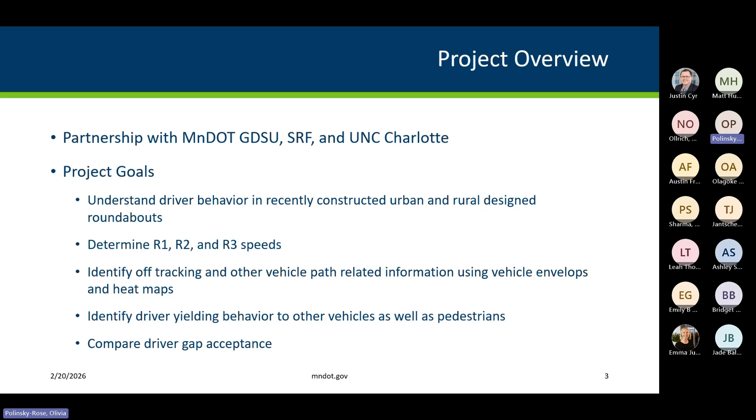Here are our roundabout locations. We have 2 urban roundabouts and 2 rural roundabouts. The Trunk Highway 59 and CSAH 3 urban roundabout and the Trunk Highway 75 and CSAH 21 rural roundabout are located in northwest Minnesota. And the 2 Trunk Highway 13 roundabouts, one urban and one rural, are located in southeast Minnesota. One thing to note, the urban roundabouts were selected because they have similar geometry as well as similar AADTs, and they are close to the rural roundabouts.

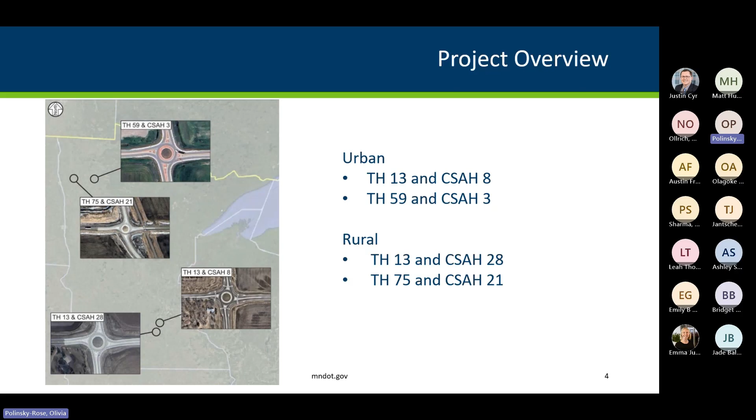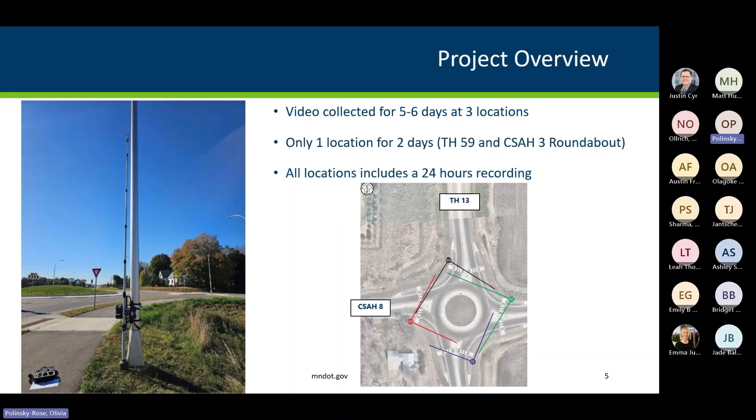light pole nearby. And videos were collected for 5 to 6 days for 3 locations, only 1 location for 2 days. That was the Trunk Highway 59 and CSAH 3 roundabout location, due to issues with equipment. All locations included a 24-hour recording, as our goal is to capture driver behavior at night time.

splitter island. On the Trunk Highway 59 and CSAH 3 location, the pedestrian accommodation is slightly different. It's actually immediately back of curb.

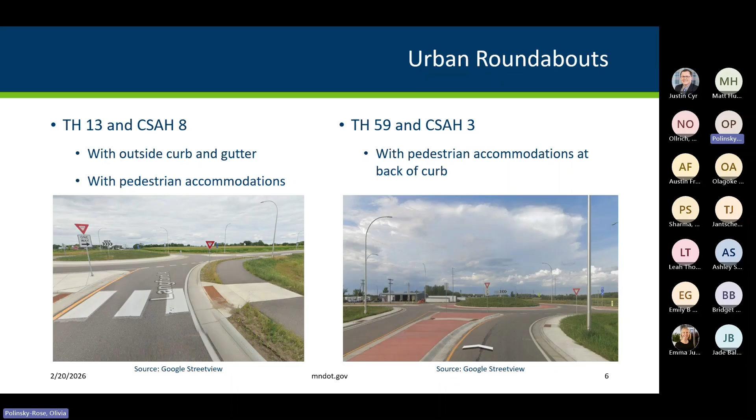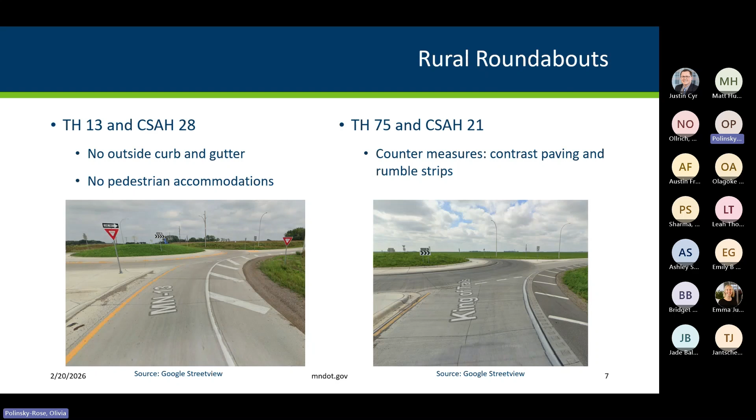And with that, I'm going to turn over to Justin. Justin, if anybody says they can't hear me online, I'm going to clip this. I have 2 hands here.

So thanks, Gwen. I'll give an overview here of the AI program itself. Can't take any credit for this. This was all UNC Charlotte. Out of their electrical engineering group, they've developed this model. One of the reasons we went with them, their model specifically uses and has been trained on lower resolution cameras.

A lot of the safety studies that folks are doing, one of the biggest things we hear from the vendor side is we need high definition video, right? We need HD. And given the location of the roundabouts, we were kind of concerned with battery life, being able to collect this from a high definition standpoint without a power source out there, without a trailer mounted camera.

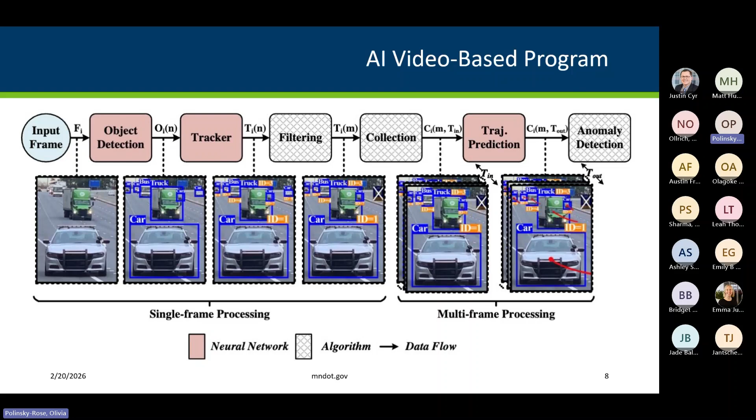So that is my non-scientific description of what this is doing in the background, but a nice picture here in terms of what's going on. This is a screenshot of the system operating.

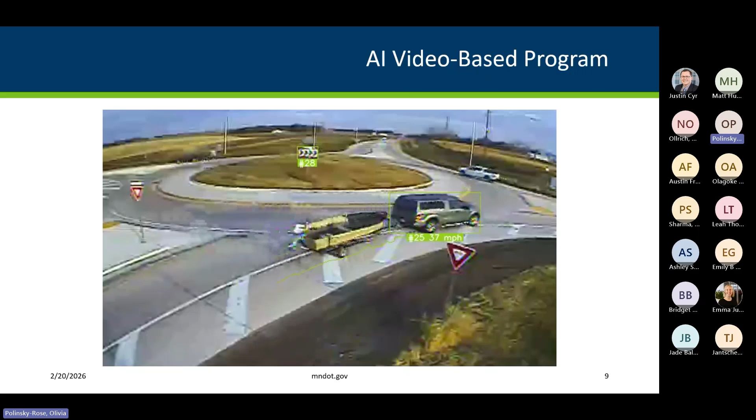As Gwen mentioned, we did a survey of the districts. So District 1, 2, and 7 have all implemented a rural roundabout design in the districts. And so we wanted to ask them, how are these working? You know, why'd you do it? Why'd you go that route? What were some of your considerations from a design standpoint? Was cost a factor? Were peds a factor?

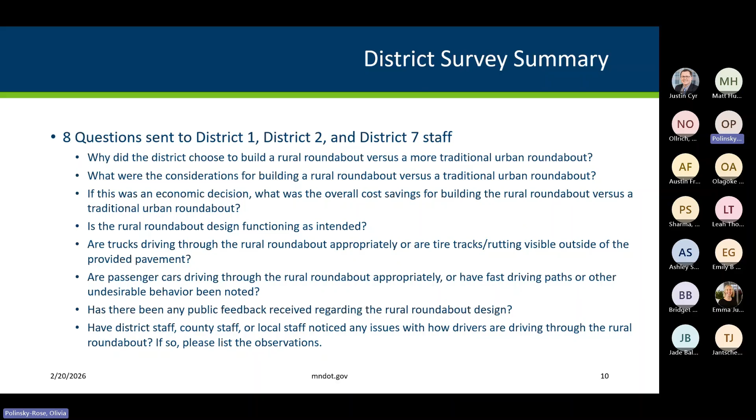And so these are the 8 questions that we asked. Not going to read all of them, but the answers can really be put in 4 buckets. So we've got the design considerations and location piece. So to what Gwen mentioned earlier, the context was key, right? Why do you do this? We don't necessarily, from a maintenance perspective, want to have full ped accommodations out there during snowstorms. They saw it as a potential liability, being able to get out there in time to clear it.

The functionality piece, in general, they were operating as expected, but not a surprise. Folks were, at least visually, they felt, driving through them faster at a higher speed than a traditional urban roundabout with that outside curb and gutter. From a maintenance perspective, the rural roundabouts did see quite a bit more off tracking, and you'll see that in some of the videos, some of the heat maps that we're going to show later. You can actually see the rutting in those pictures.

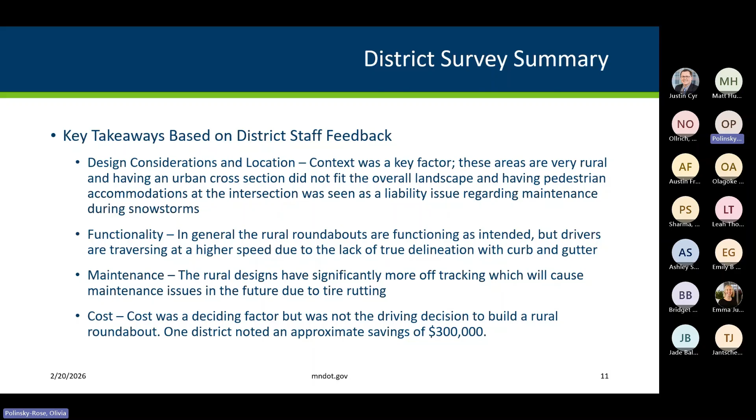Cost was a factor. We had one district that noted a $300,000 savings on the cost of the roundabout, but it wasn't the key factor, right? It was just one of many factors that they took into consideration there.

So as Gwen mentioned, we had 4 locations. So we have our two urban locations. This was the first one, Trunk Highway 13 and CSAH 8, which was in the southeast portion of the state. This is the one that had the trail facilities with the separated grass median there. The values you're seeing on the screen, these are our R1, R2, and R3 speeds that we were able to gather from each approach, and its average speed, 85th and then the 95th percentile.

Some of them do have a star next to them, just due to the lower resolution camera and the width of these roundabouts. You can imagine, when you're looking at that exit speed way back here at the crosswalk, you're about 200 feet away, give or take. And while with an HD camera and some of the technology that's out there, we might be able to capture a speed there, how accurate it's going to be, it's going to be tough.

I see Joe's. I can do that. For those who aren't familiar, R1 is actually right before the crosswalk here on that entry speed. And then R2 is kind of right in this general area here from a circulating perspective. And then R3 would actually be on the back side of that far crosswalk. So that's part of the reason why that R3 speed is so hard to capture from a video perspective, at least in this field of view.

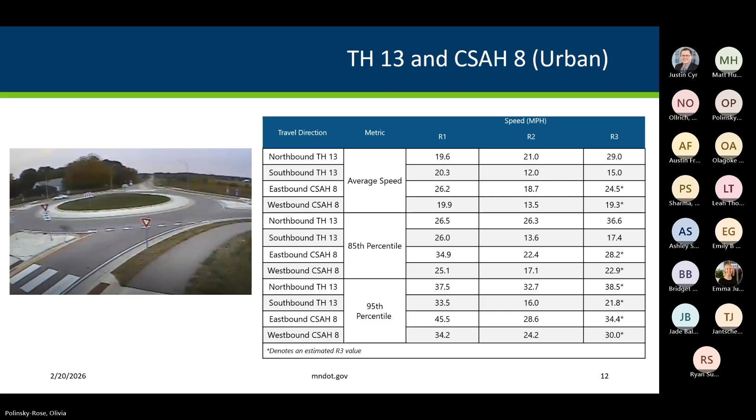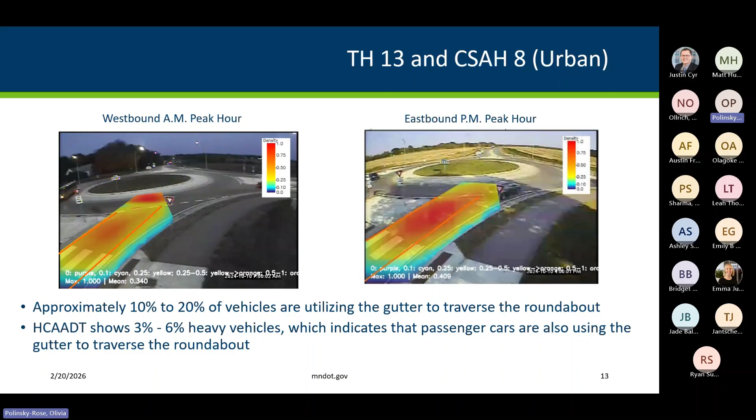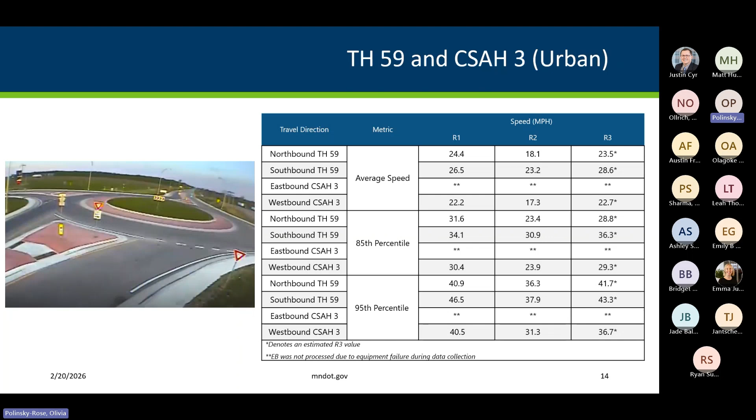Similar situation for the other urban roundabout in the northwest portion of the state. As Gwen mentioned, we did have a camera issue out here for this one, so we didn't get as much data, and unfortunately we lost the ability to get good eastbound information at this location as well. But from a number standpoint for R1, R2, pretty consistent from what we saw at our other location. And then similar from a heat map standpoint too.

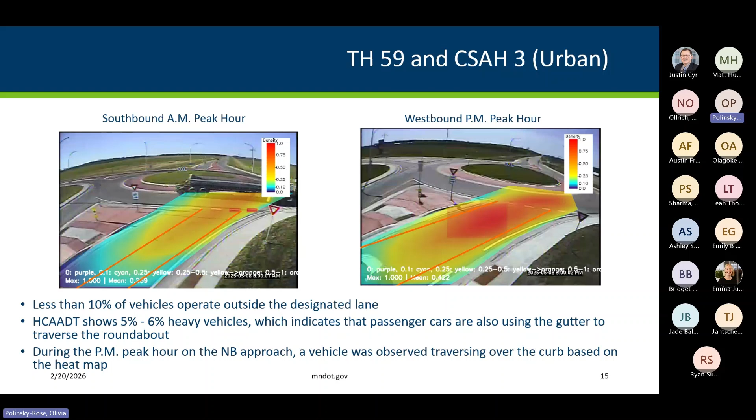So for this one, a lot less in terms of people kind of driving outside of that designated lane, out onto the gutter. But we do have a little bit higher heavy vehicle percentage. So apparently folks in Northwest Minnesota stay in the lanes a little bit better than folks in Southeast. But I will note that we did have one of the trajectory lines that actually went over the curb. So we did have one vehicle that traversed over the curb at this location.

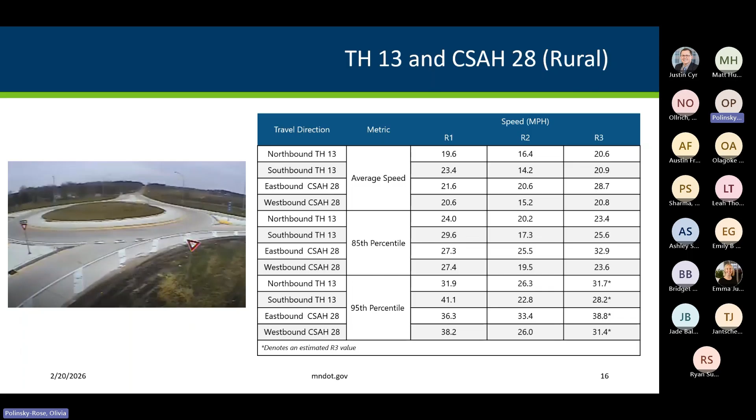Now the rural roundabouts. So this was the other Trunk Highway 13 location down in Southeast Minnesota. This location had just a striped shoulder. This is the one that did not have the color contrasted pavement with the bit on the outside. And you'll notice in general, the R1, R2 speeds are higher across the board. If you went approach by approach, they might vary a little bit, but in general, they are higher for this location. And I mentioned earlier, for those in the room, you might be able to see it, maybe not, the rutting as well in that camera view. So some significant tracking issues here at this location.

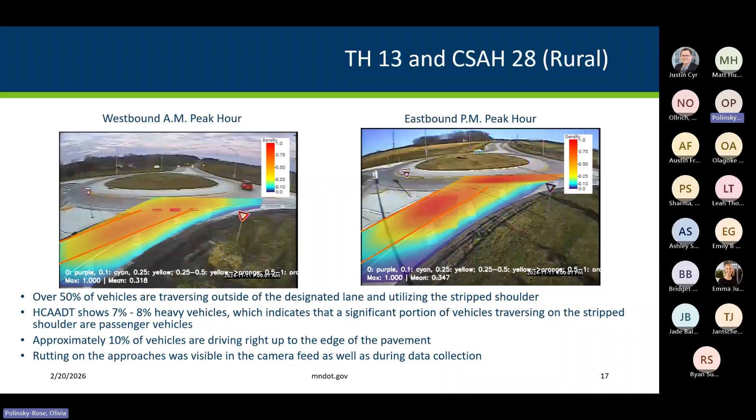And our heat maps told us the same story. So we had over 50% of the vehicles actually traversed on the striped shoulder to go through the roundabout, and only 7 or 8% heavy vehicle. So quite a few passenger cars that are doing the same thing. This is the example too with the boat from earlier. So quite a few folks who are doing it. And we had 10% of the vehicles actually driving right up to the edge of the pavement. So they are cutting it as far over as they can to get through the roundabout. And then I mentioned the rutting as well on this one.

Our other location, Trunk Highway 75 and 21 up in Northwest Minnesota. This had the color contrasted pavement, as Gwen mentioned, and the rumble strips right on the back side of the edge line there. In this location, R1, R2 speeds were about the same as the urban roundabouts, and were slightly less than our other rural roundabout. So in general, people were kind of slowing down a little bit more. The biggest difference is really in that R2 speed column, where we saw the most difference between the two rural designs.

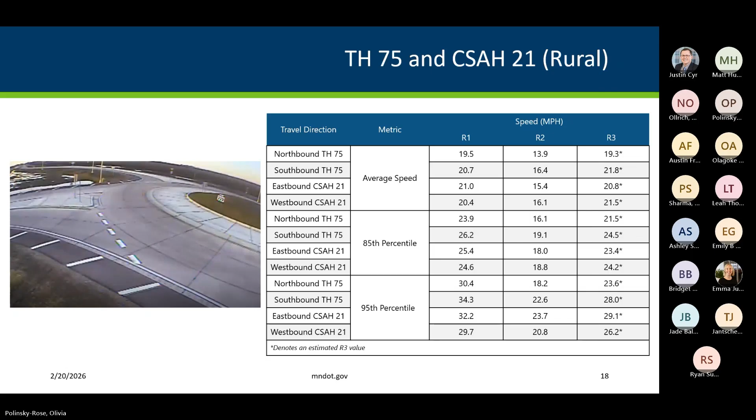And the heat maps tell the same story. So less than 10% of vehicles actually off track outside of that designated lane, so on the striped shoulder outside of the rumble strip. And we had 28% heavy trucks here, so not all trucks are tracking off either.

So this really kind of helped keep people in the lane where we want them to be, provided that kind of line of sight for folks. Where am I supposed to be? Where am I not supposed to be? And at the time that we did this, there was no apparent rutting outside of the pavement either. So another nice piece there for this one.

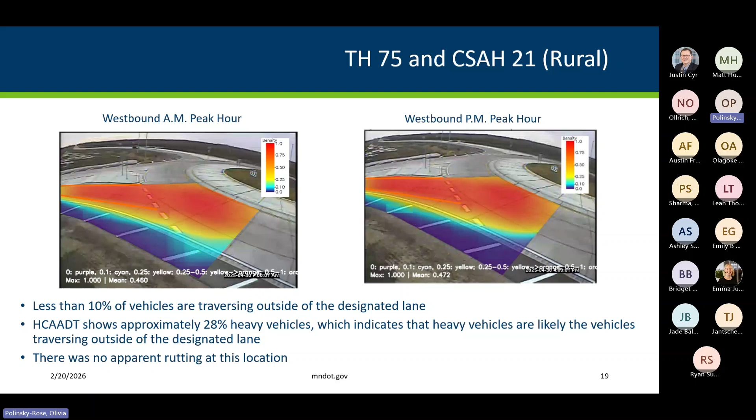But you can see the lines are a little harder to see on this one because the density is so high there in the traveled lane, but everybody's kind of hugging that inside island and then going to the outside as they traverse through, kind of traditionally what we would expect to see. And with that, I'm going to turn it back over to Gwen.

All right. Is it on? Okay. These tables summarize the data that Justin has gone over. So it summarizes all 4 roundabouts, all 4 R1 speeds, and it summarizes the average speed, the 85th percentile, and the 95th percentile.

As you can see, when you compare the R1 average speed between Highway 13 and CSAH 8, and Highway 13 and CSAH 28, the rural roundabout has slightly higher R1 speed when compared to the urban roundabout. However, when you compare the Highway 59 and Highway 75 roundabouts, the opposite happened. So the urban one actually has higher average R1 speed than the rural design. Because of this, we couldn't make a conclusive decision on whether drivers are driving faster on the rural design when compared to the urban design.

However, when you compare the R1 average speed for both rural roundabout designs, you can see that the rural roundabout at Highway 75 that has countermeasures like edge line rumbles and colored pavement contrast has lower R1 speeds. That suggests that those countermeasures are effective in reducing R1 speeds. And what we have found from the 85th and the 95th percentile speeds is that those are higher, which suggests speeders are traveling faster through the rural roundabouts.

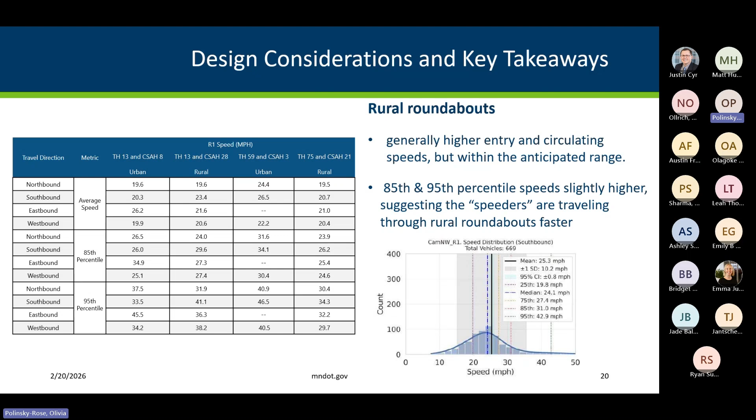And this table summarizes the percentage of vehicle off tracking for all 4 roundabouts. As you can see, on urban roundabouts, drivers are driving the roundabout as intended, with roughly 10 to 25% of vehicles driving over the gutter, depending on which urban roundabout you're looking at. If you are looking at the Highway 13 and CSAH 8 roundabout, it has 10 to 25% tracking over the gutter, which suggests that both the heavy vehicles and the passenger vehicles are using that gutter space when traversing through the roundabouts.

But when you take a look at the Highway 59 urban roundabout, it actually has less than 10%. That suggests to us that maybe only the heavy vehicles are using the gutter space.

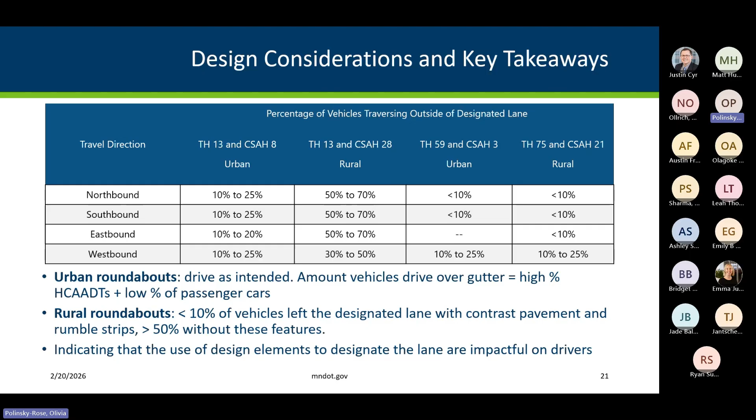When you compare the rural roundabout off tracking, the 2 rural roundabouts are drastically different. The one with countermeasures such as pavement contrast and rumble strips only shows less than 10% lane departure behavior. And the one without those countermeasures shows a high percentage of lane departure, 50 to 70%. This table indicates that the countermeasures are effective in preventing lane departures.

And this table summarizes all the gap acceptance for both AM and PM for both roundabouts. The gap acceptance for all roundabout types is within the 4 to 6 second range, which is within the anticipated range for roundabouts. And what we have found is that gap acceptance is actually pretty consistent between rural and urban roundabouts.

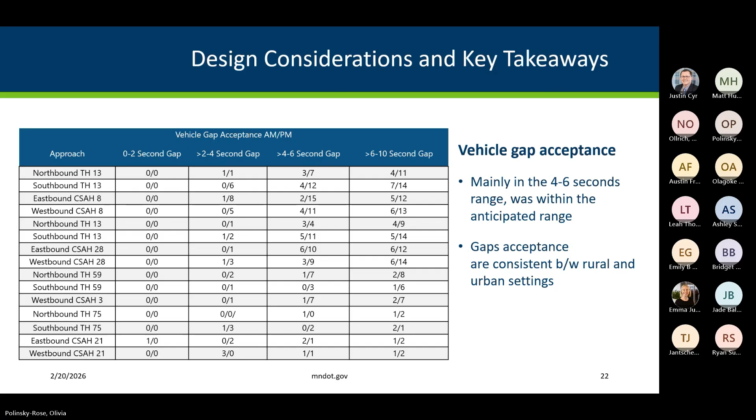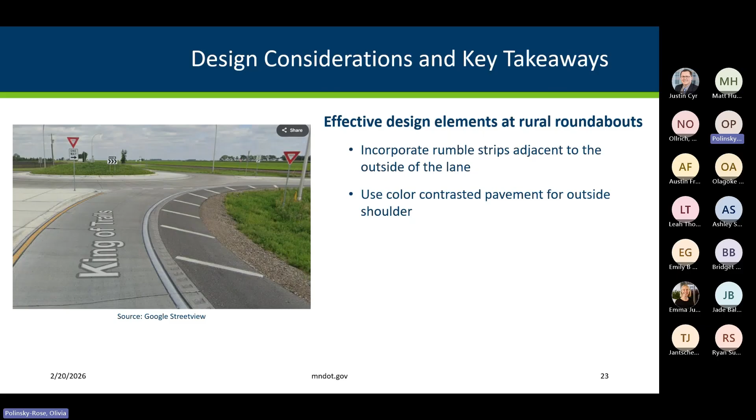And so the key takeaways for this project: what we have found is that when we are considering these rural types of roundabout designs, we should incorporate edge line rumbles as well as pavement contrast and also shoulder striping too.

The lessons that we have learned are that we should have used higher quality videos and maybe set an additional camera to capture the R3 speeds better. And maybe we should use drones or set up trailers to set the cameras higher so we have a better view of all the driving happening. And also, we should definitely select a location with higher pedestrian usage so that we can better capture driver yielding behavior to pedestrians, since we did not capture any pedestrians at any one of these roundabouts.

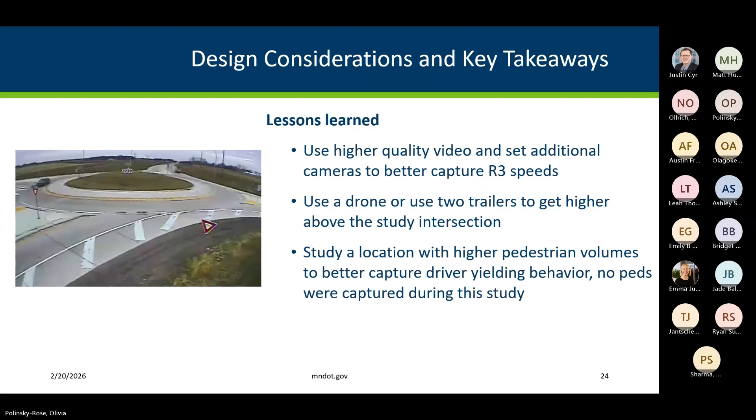And I think that concludes our presentation. Any questions?